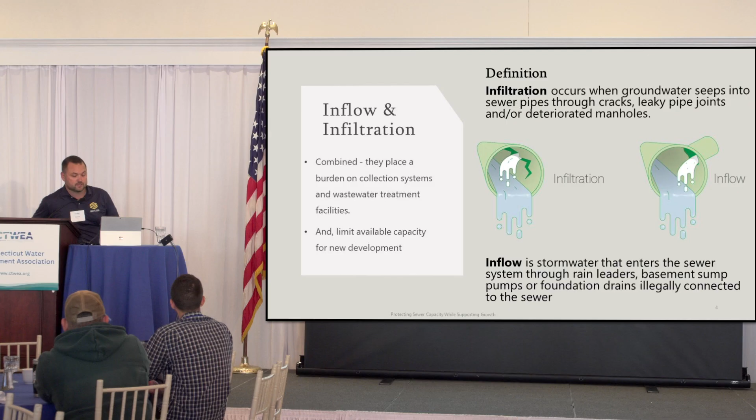Next, I want to ask Ben to come up just briefly and talk a little bit about flow monitoring.

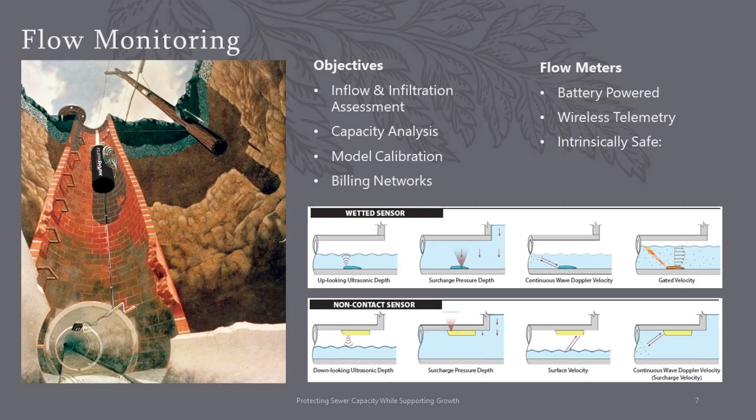When talking about capacity, flow monitoring and understanding what's actually going on in the system is really important. There are a number of ways of doing this, but oftentimes you have a data logger transmitting data, and you're installing a sensor into the collection system. As you can see here, we have a meter at the top of the manhole, and an area velocity sensor down in the pipe. That's a typical setup.

These are devices that can be deployed all throughout the system. They're battery powered, and often communicate to some kind of wireless or cloud platform, so you can view that data in real time or near real time. I have a few sensor types, and also the typical objectives we have when doing flow monitoring. Understanding capacity is a really important first step in understanding what's actually going on in the system.

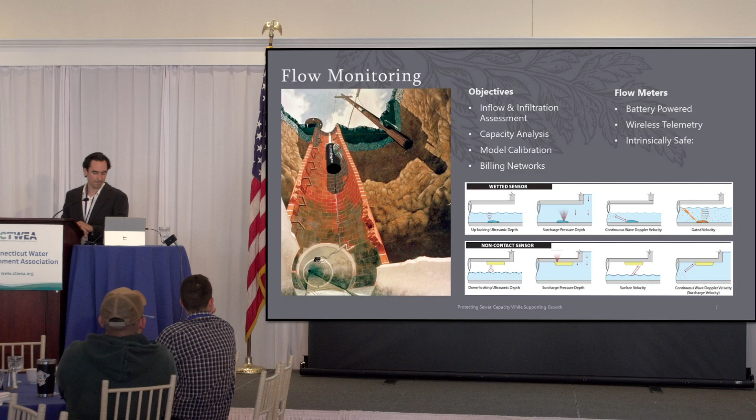Is there another one? Yeah, there is. Oh yeah, and I just have a screenshot of some typical flow data.

For those of you who maybe haven't seen it, you'll see this increase in flow over the day, typically a diurnal pattern. In the morning, folks are using a lot of water, and then that peters off as people go to work. When they're returning and maybe showering or cooking, you see another flow peak. So looking at those peak flows compared to the average flows is an important step in understanding what's going on in the system.

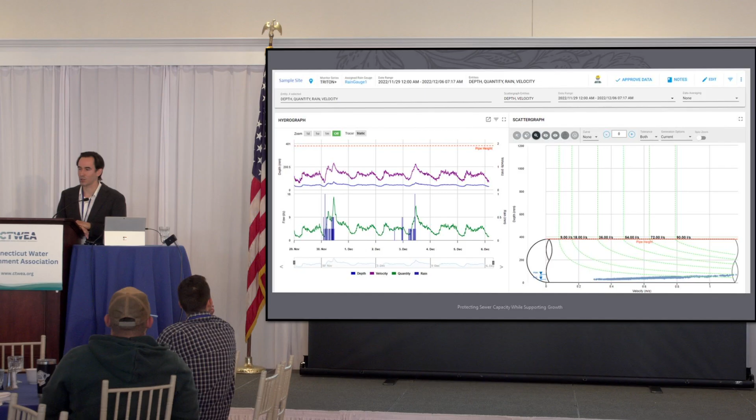All right, now we'll touch a little bit on hydraulic modeling, and Joseph will come up.

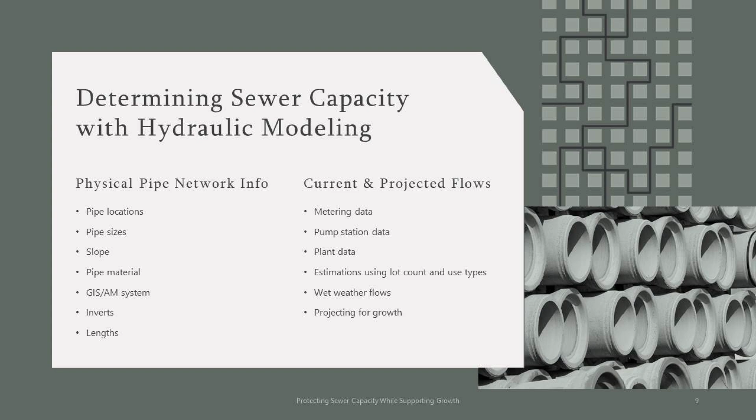All right, so I'm going to steal a little bit from what was before. How many of our operators or towns around here have and run a hydraulic model currently? Fewer hands than people who are aware of I&I. So as we start talking about protecting capacity, we've got the flow monitoring component, but also it's understanding: how much capacity do you have in your sewer system? That's where hydraulic modeling comes in.

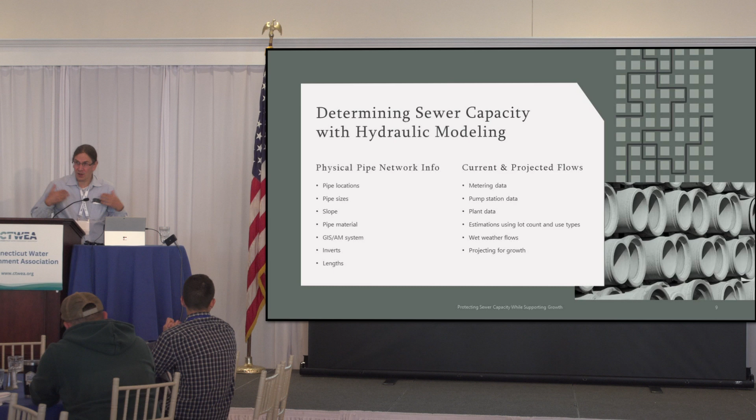I always talk about hydraulic modeling in two parts. There's the flow data we talked about, but then there's what I always think of as the skeleton, the pipe network. So the biggest thing is to create the pipe network, have the infrastructure knowledge. People who have GIS systems, if you have that information, on the left side here is the pipe network info—that's what you need to collect on the structure to set it up. The biggest parts are pipe size, pipe slope, locations, and pipe material. That's the first bit you can start with for a hydraulic model.

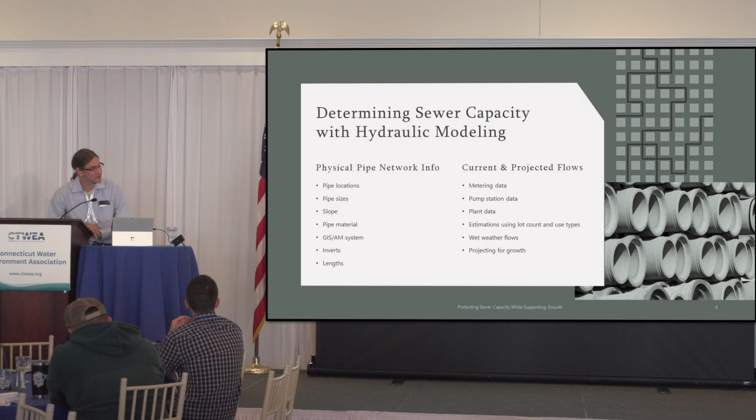The rest of the information beyond that helps with added levels of complexity, which we'll get into later probably. As we talked about on the flow side, those are the sources of flows—whether you have flow metering data, or can estimate based on lot counts, types of uses, and things like that. Different ways to create these two, and then putting them together: how much capacity do your pipes have, how much flow is actually in your system. The comparison of those is how you start to get to the answer of whether you have capacity or not.

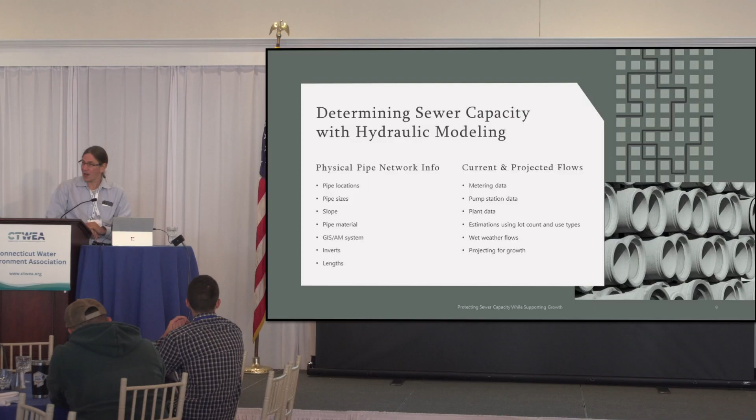Especially as these questions of growth start to come up. And this will be for Travis from Savy & Sons, on I&I strategies—feel free to answer from over there, and talk a little bit about some of the reduction approaches in regards to I&I.

Me? Yes. Oh, I can't really see the slide over there. Yeah. So is this too loud? We're good? All right, cool.

Yeah, absolutely. So reduction strategies, as I briefly went over prior, starting at the manholes—the riser joints, the lift holes, all those things, the pipe penetrations where they're coming in through the manholes. Those are a lot of areas for reduction strategies, simply popping a manhole cover and going in there and looking: do you have any water pouring in?

From a show of hands in the room, does anybody know if, where you work, anybody doing that, checking any I&I? Yeah, a little bit. Yeah, that's good. That's where it starts. If you don't know, you can't fix it.

The main thing we see in the industry being a service provider is out of sight, out of mind. Driving down the road, you see a pothole, let's dig it up, fix the pothole. Well, why is there a pothole? Mostly because the underground infrastructure is failing. A lot of times it could be I&I, and it's taking all the gravel and fine sediment and silt with it. You have to fix the source of the problem, or you're just going to be putting Band-Aids on top of the roads.

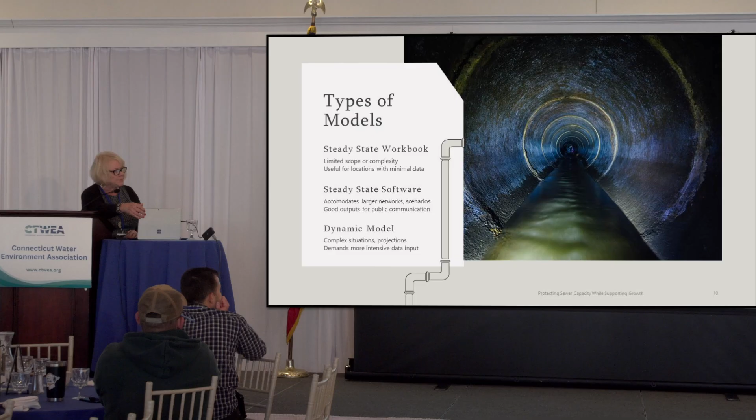Yeah, this works. Yeah. So I kind of introduced it before, and we were talking about flow monitoring, and one thing I'll slightly correct you on, Ted, is you said the flow monitoring data was kind of obsolete at this point, and it may be from an I&I tracking perspective, because things may have changed in 5 years - I don't remember how long ago you said. But that data can still be useful in terms of a hydraulic model, to at least have an understanding of what's going on in the system.

So again, switching a little bit from the I&I - obviously reducing I&I, you're getting flow out of the sewer, so it will actually provide capacity back. But if you're just looking from a standpoint of, hey, I've got some pipes, I've got some flow, but how full are these pipes - that flow data is still absolutely useful for it. It's a snapshot in time. You can figure out how much capacity was still available in those pipes at that moment.

So I do this a lot for folks, especially when towns are having developers come in. You're talking about adding - a lot of people are doing those intense high density residential developments. We're bringing 100 apartment units into this area, and can you serve that area? And so even a lot of people before didn't say we'd have hydraulic models, but I'm assuming most folks here have some sort of GIS system that at least shows you where your sewers are, gives you your size, has depth. With GIS, you can get length. You really already have the data available to set up even a very simple steady state hydraulic model.

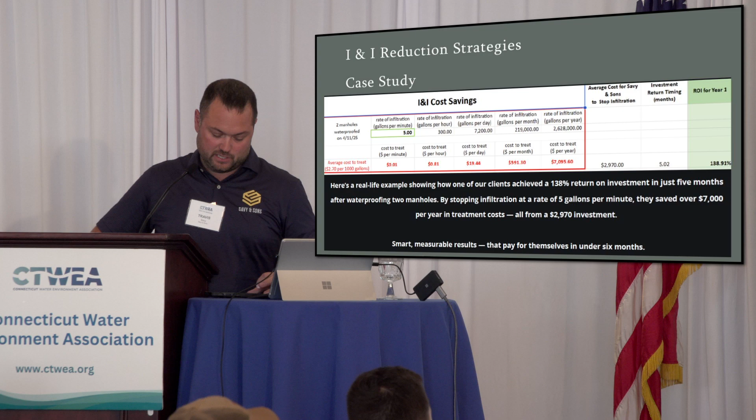So if you look at this, it's just a really simple 5 gallon a minute I&I leak here into a manhole. You can see this is from this year. This is an average cost that we took from local municipalities around the state. You can see what it costs per minute, per hour, per day, per month, per year, and what the cost is per year from a 5 gallon a minute leak, over 2.5 million gallons per year of I&I, and that's costing you just over $7,000 to treat at the rate of your cost to treat wastewater. Does that make sense? Yeah.

So with that being said, the average cost of a company like ours is about $3,000 to stop that leak. So you're getting a return on investment in half a year, 5 months, so 138% ROI. And you're saving $7,000 a year after that on a very small leak like that.

The power I want to give this is, if you take a job we just did, we stopped a leak of 200 gallons a minute in a sewer system. So if you go from 5 gallons a minute at $7,000 a year, that's a 40 times increase. So if somebody can pull out their calculator and do $7,000 a year times 40, and tell me what that dollar amount is, please.

So could we all agree that $280,000 is a significant savings? Would anybody want to not spend 280 grand if you just simply didn't know about the leak and get that money back, and we could all agree we could put that money towards something else? So fix your I&I.

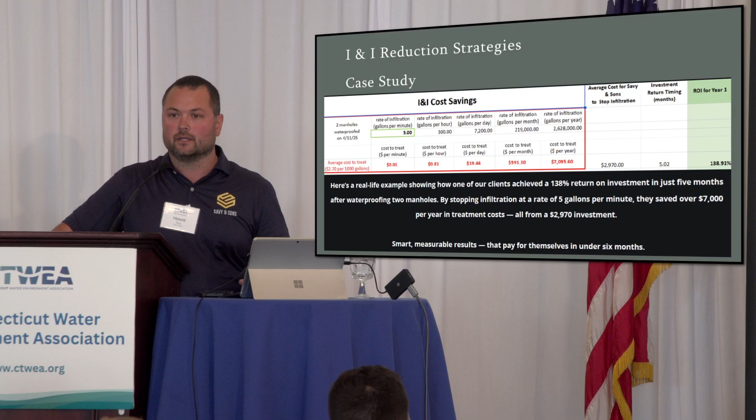So we get the manhole lid sealed, we go in there, get the manhole sealed, pipe penetration, pipes, lateral lines, and just help mitigate reduced I&I, and you're gonna be able to see black and white your guys' savings. And I know they got the cookies out, so I'll stop talking.

Thank you. Go ahead, I know there was a couple parts to his question. Exactly, I was going to try to talk to one of the other parts of Ray's question.

One of the things, internally when we're helping scope out a lot of these SSES kinds of studies and how you do things, I always say internally and also to clients is the idea of keeping that goal in mind. When you enter into that SSES, when you're trying to find that I&I reduction, keep that goal in mind - what started you on that process?

If you're trying to engage an engineer to do SSES, you have a problem you've identified, you know what it is. Always make sure we keep that in mind, because that's always going to guide the scope of what you want to do and how you want to attack it, how hard you need to attack it, how long you have to approach it - whether you phase it, do a bunch in 1 year, or phase it over 10 years.

Whether you're trying to look for inflow and trying to do more of a smoke testing or a manhole inspection, or you're trying to find those - the baseline of your flow keeps creeping up, so that's probably those everyday leaks. That could still be manholes, but maybe more pipes and things like that.

I always advocate keeping an eye on that goal of what sets you on that process of needing to do an SSES - what's making you have to go find those leaks? Is it the peak? Is it the baseline? Is it specifically a cost thing - the plant's running fine, it just costs too much? Keeping that goal in mind, it's gonna be slightly different for every system, but keep that goal in mind as you both scope it out and then continue through the work.